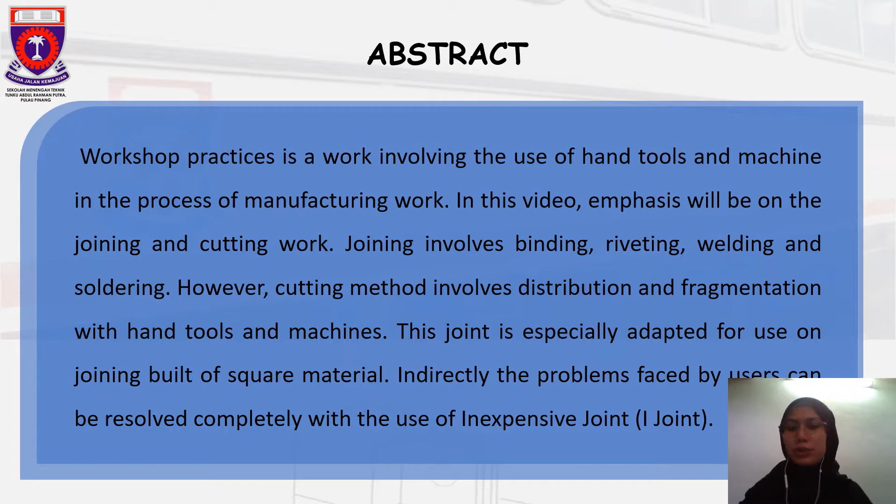A little bit on the abstract before we start our presentation. The main idea of this proposal is to reduce waste by giving full attention to recycled waste that has been disposed of, and we would like to turn the waste into a new product called Inexpensive Joint, I Joint.

Before we go through the problem statement, let me give some explanation on the introduction and project background on how the title was proposed. Workshop practice is work involving the use of hand tools and machines in manufacturing works. This report emphasizes joining and cutting works. Joining involves binding, riveting, welding, and soldering. Cutting methods involve distribution and fragmentation with hand tools and machines.

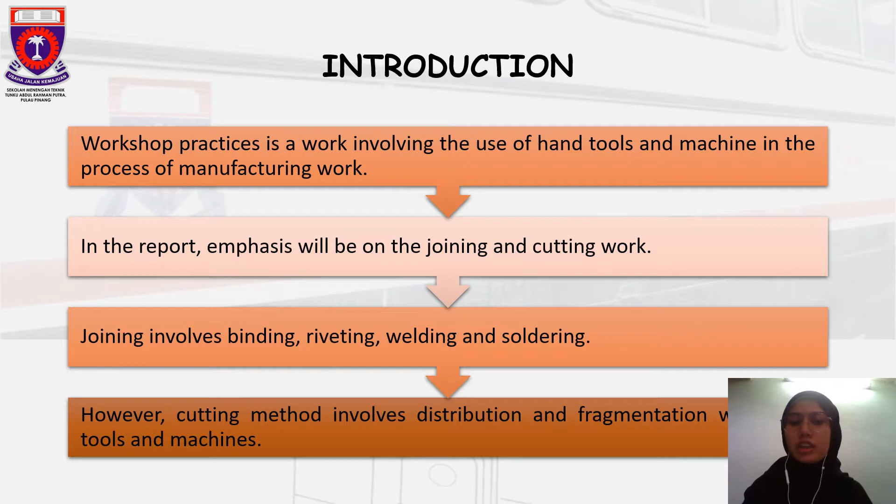The purpose of I Joint is to ease the user to install the extension that is low cost and user friendly. Other than that, it has a strong structure and is easily installed and maintained.

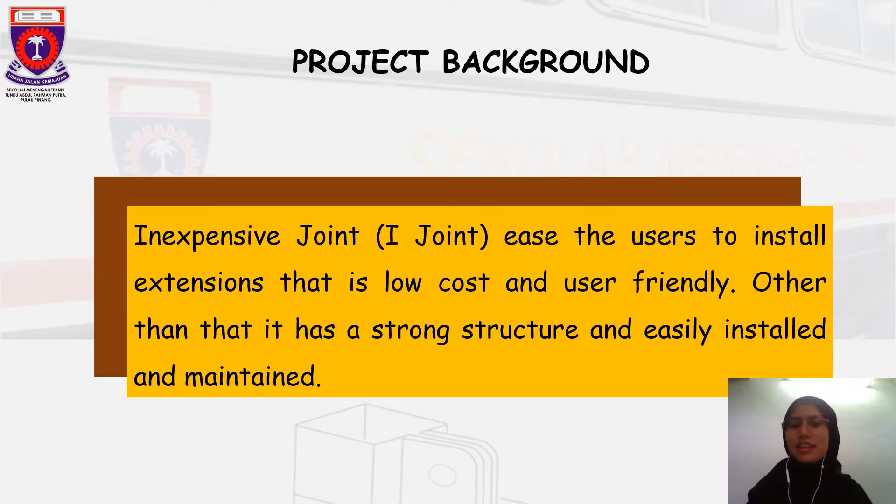Our attention now to the problem statement. Rapid growth in the metal industry has taken the country toward an industrialized nation, so these tools and machines are needed in work involving joining.

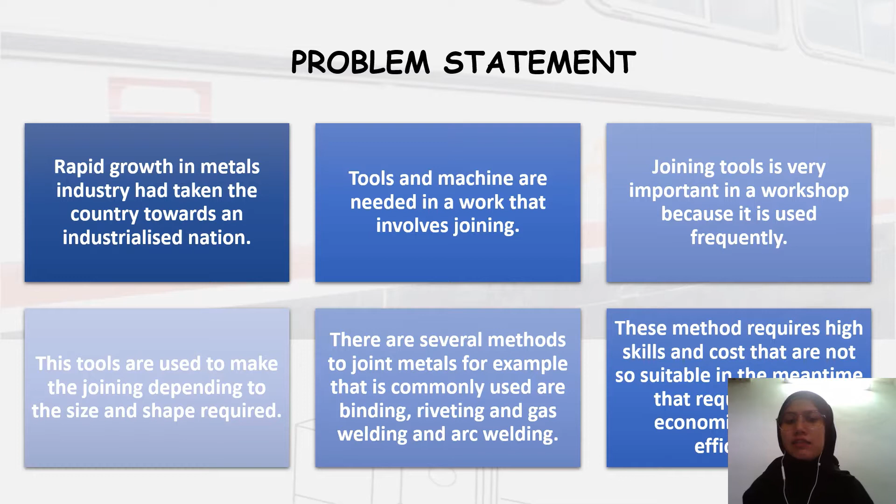Joining tools are very important in the workshop because they are used frequently, depending on the size and shape required. Several methods to join metal that are commonly used include binding, riveting, gas welding, and arc welding. These methods require high skill and cost, which are not suitable when work requires economy and time efficiency.

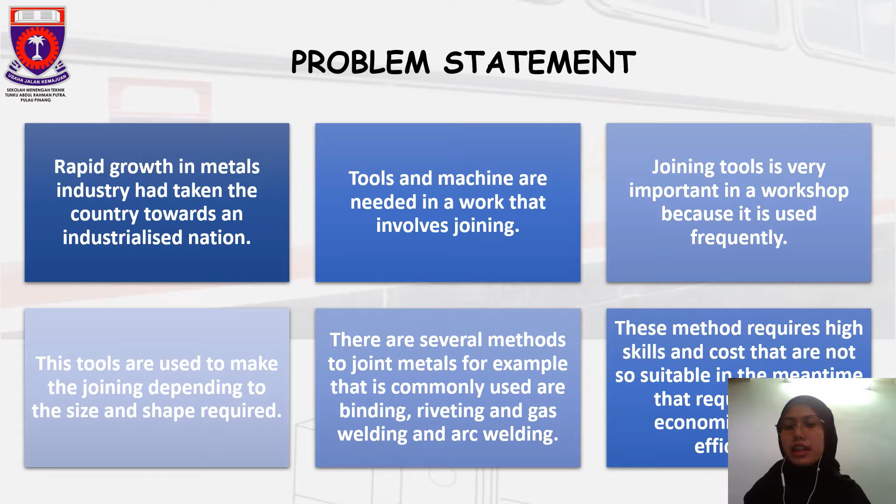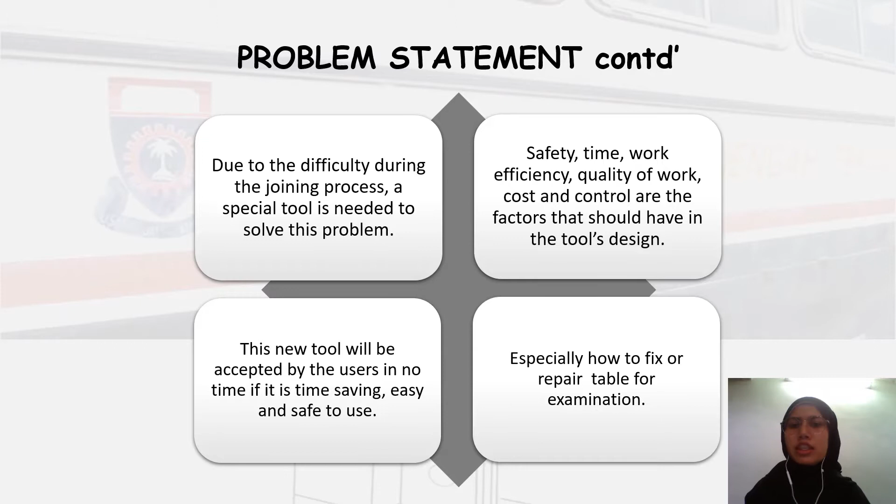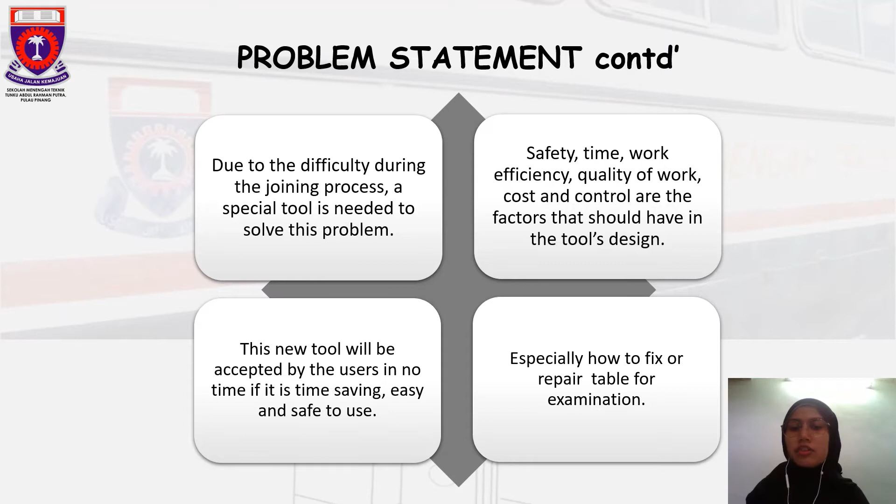As we are aware, due to the difficulty during the joining process, a special tool is needed to solve this problem. Safety, time, work efficiency, quality of work, and cost control are factors that should be in the tool design. These new tools will be accepted by users in no time if they are time saving, easy and safe to use, especially for fixing or repairing the table for examinations.

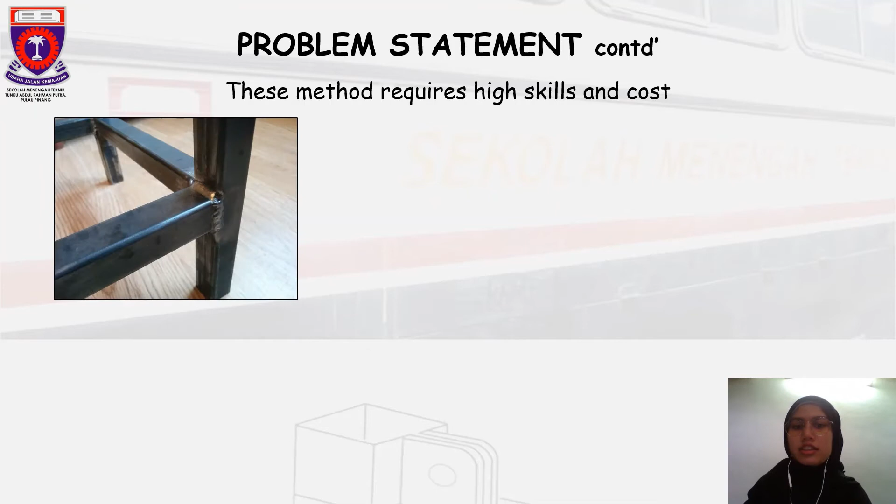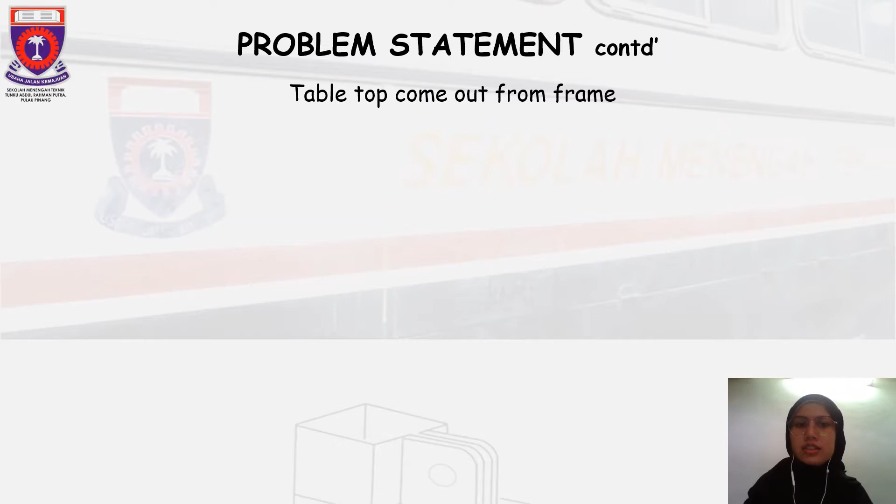Other methods require high skill and cost. This is a type of binding or joining that has been in our market. For our iJoin, we came up with a case study - this is a tabletop that has come out from the frame.

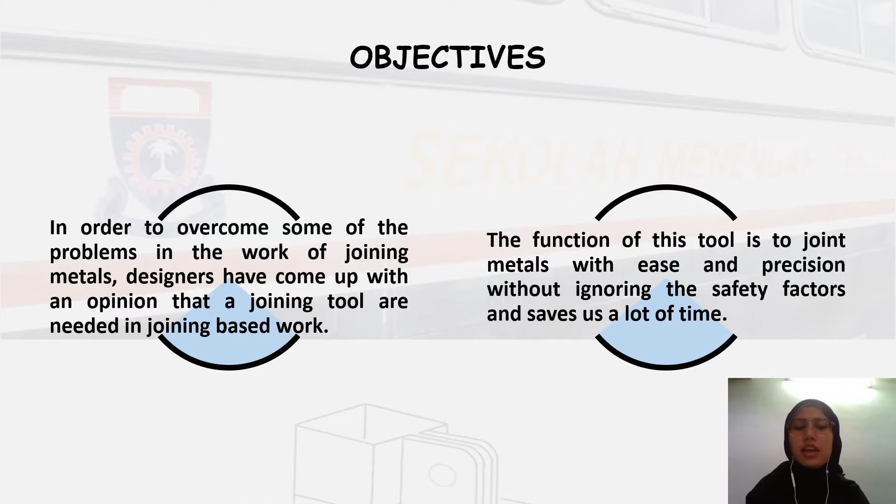Shall we continue on the objective of this innovation project? In order to overcome problems in joining metal work, designers have come up with an opinion - joining tools needed in joining-based works. This function of tools is to join metal with ease and precision without ignoring the safety factor, and to save a lot of time.

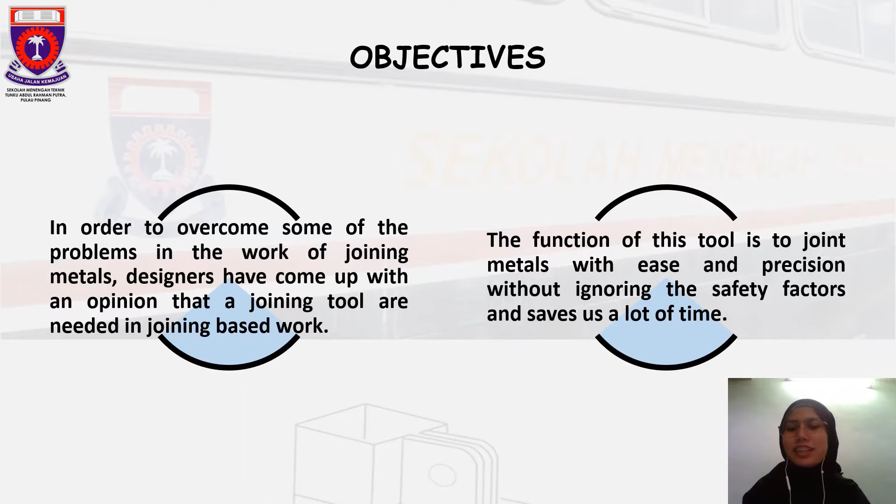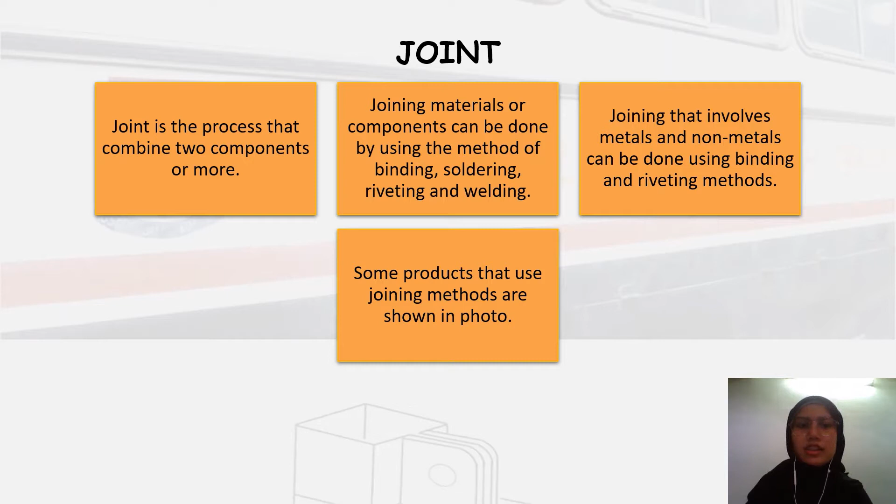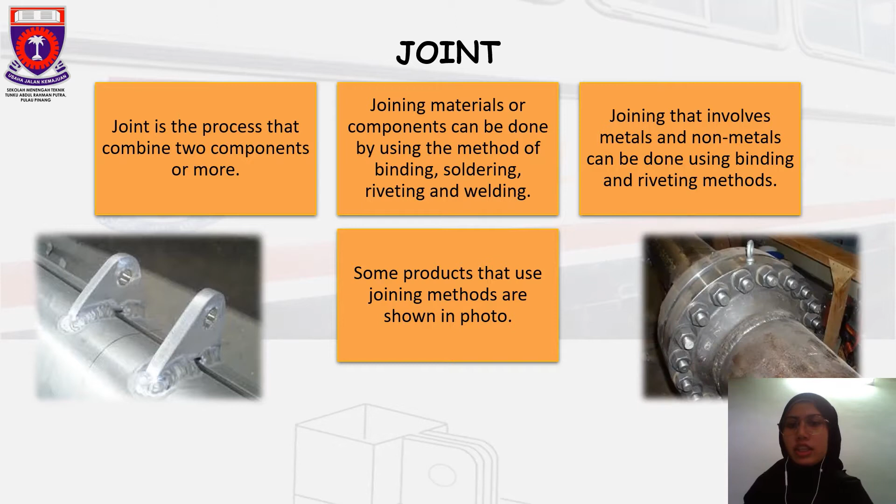Before we move to the next slide, let me elaborate on the join. The join is a process that combines two components or more. Joining material or component can be done using the methods of binding, soldering, riveting, and welding. Joining that involves metal and non-metal can be done using binding and riveting methods. Some products that use joining methods are shown in the photo.

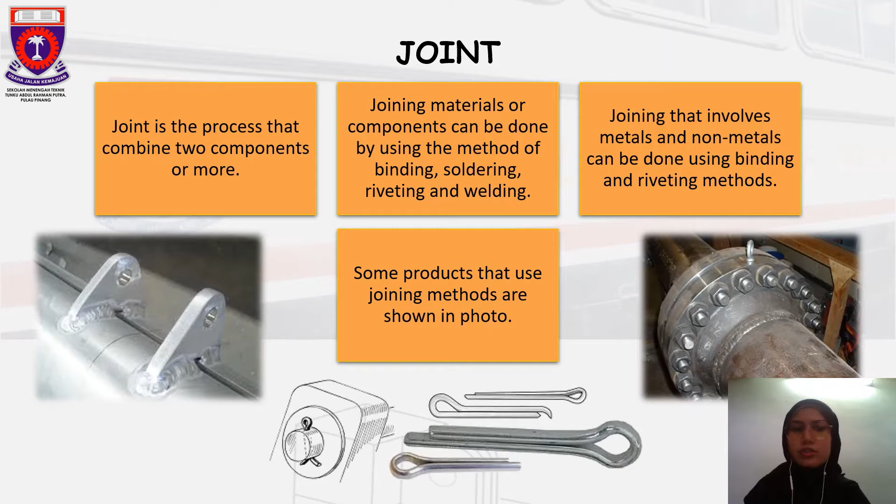These are the list of joints that have been available in the market distribution.

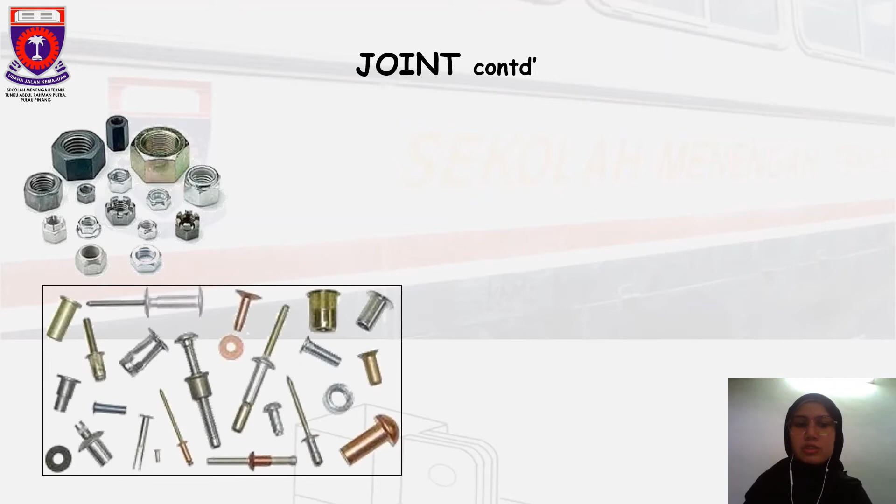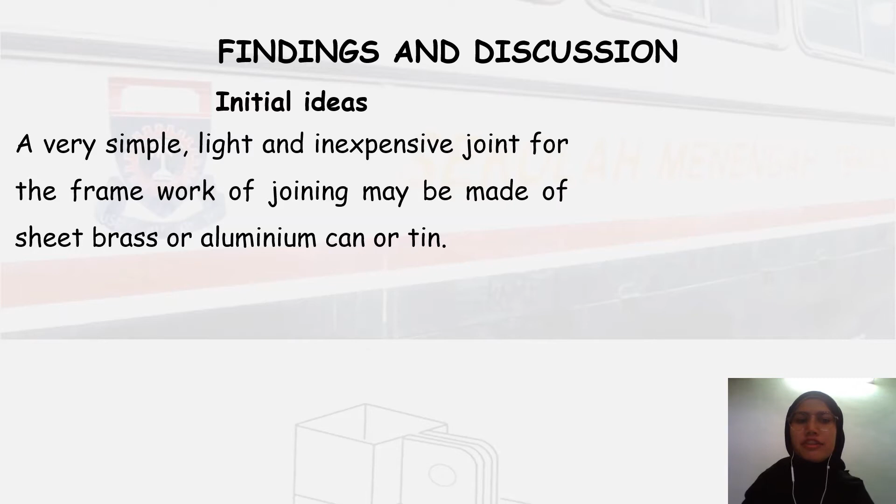We have arrived at the finding and discussion. For the initial idea, a very simple, light and inexpensive joint for the framework of joining may be made from sheet brass or aluminum tin can.

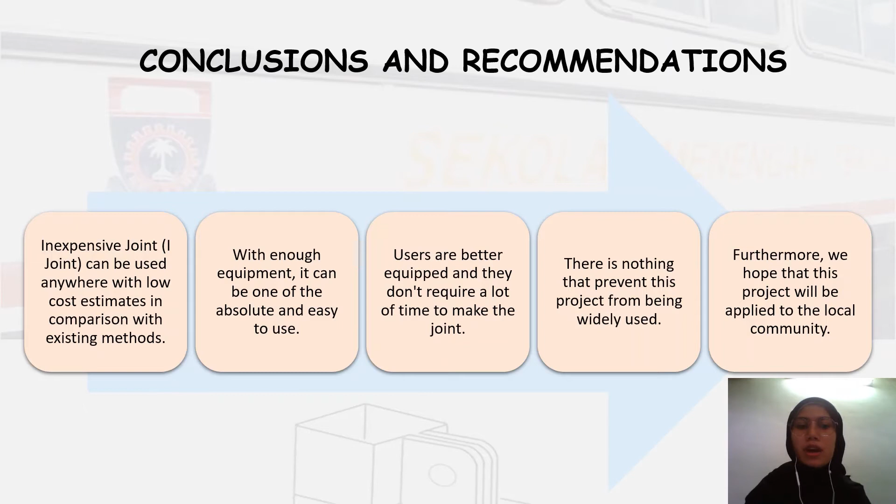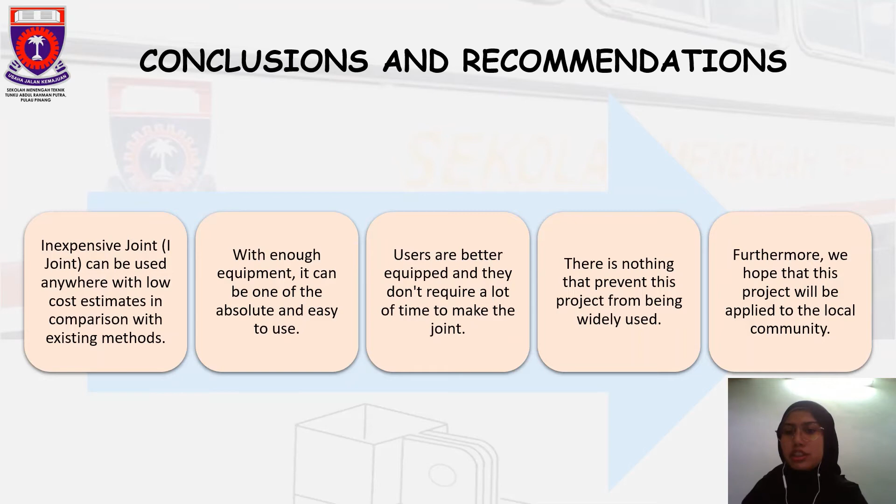Moving on to the conclusion and recommendation. The inexpensive joint, I Joint, can be used anywhere with low cost estimation in comparison with existing methods. With enough equipment, it can be one of the most absolute and easy tools to use. Users are better equipped and do not require a lot of time to make the joint, so there is nothing to prevent this project from being widely used. Hopefully in the future, we hope this project will be applied to the local community.

Next, I would like to share the method and procedure on how I Joint is made. The first thing to do was remove the bottom using a can opener.

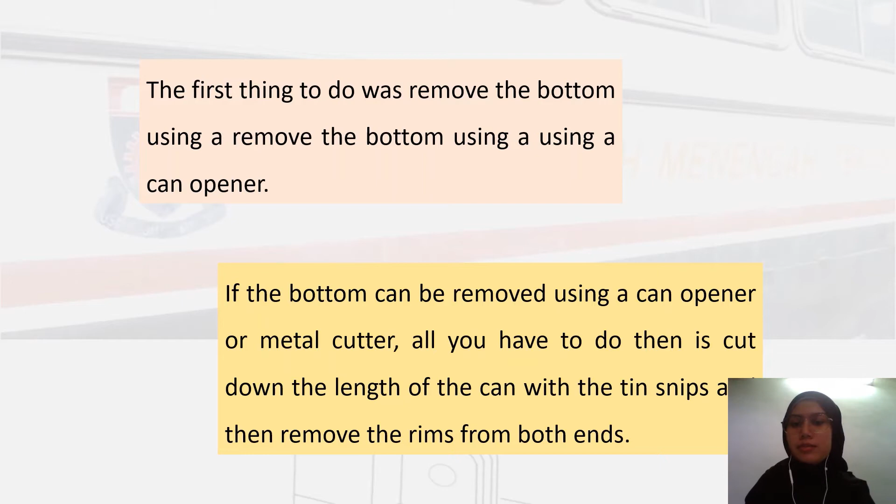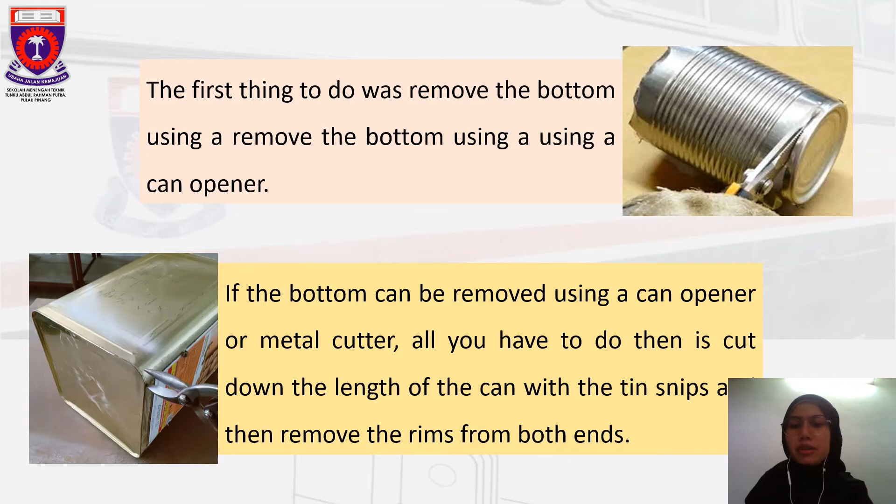If the bottom can be removed using a can opener or metal cutter, all you have to do is cut down the length of the can with tin snips and then remove the rims from both ends. This is a more elaborate photo to show how to remove the rims from both ends.

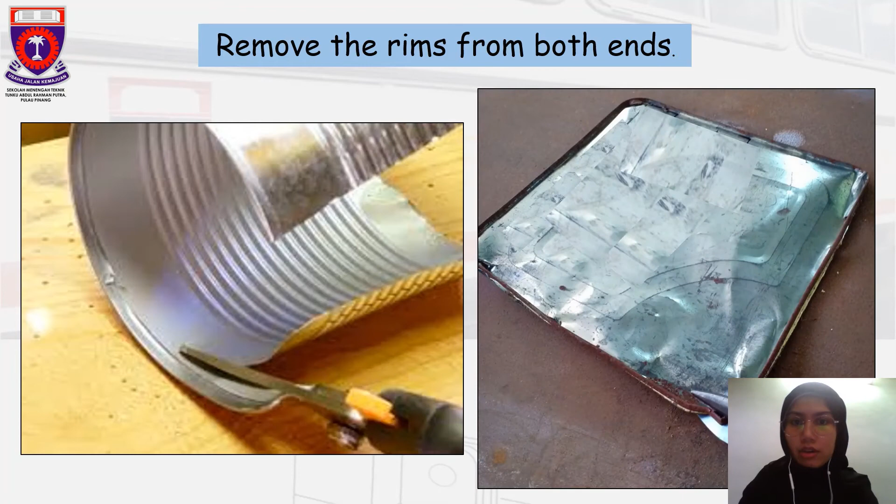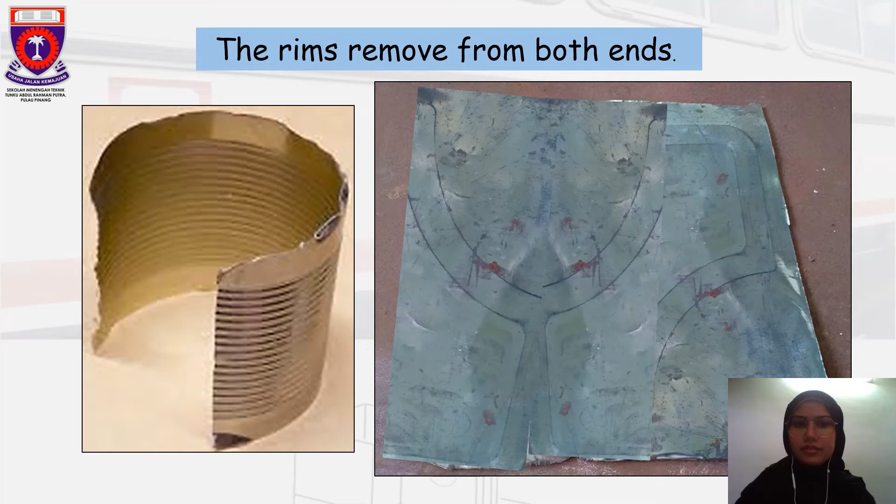Then start the process by carefully pulling the sides of each end apart from each other while gently pushing on the metal with your thumb.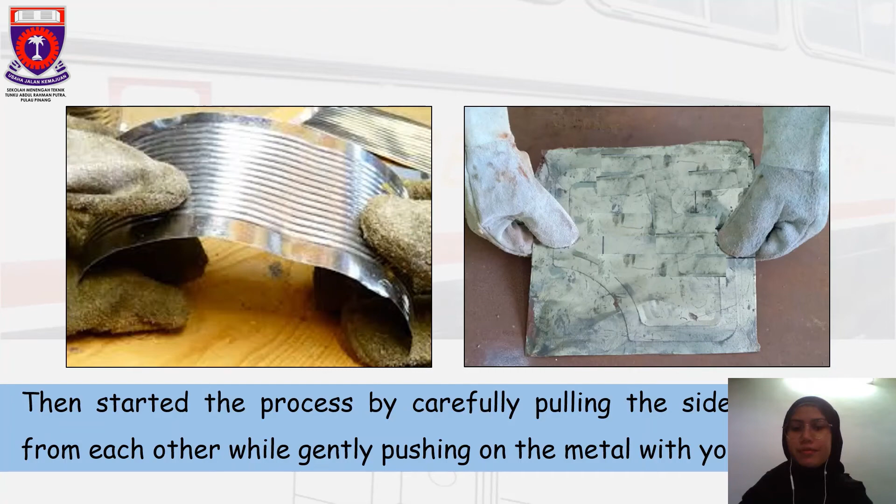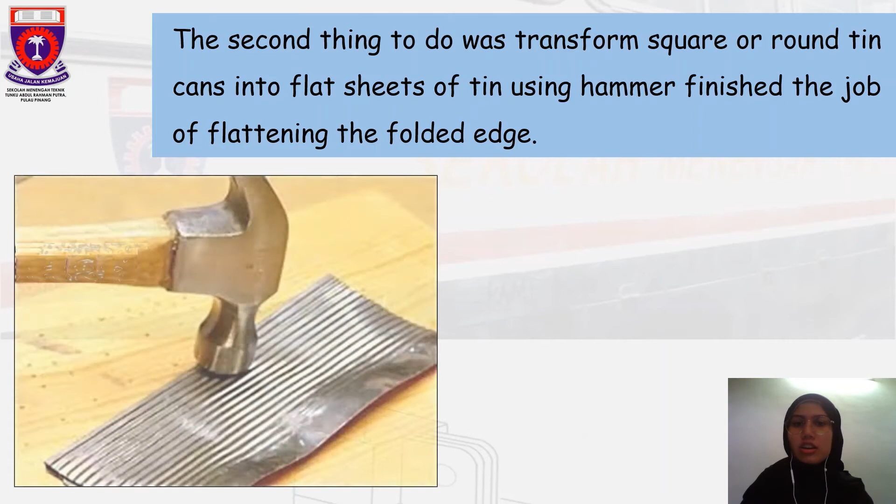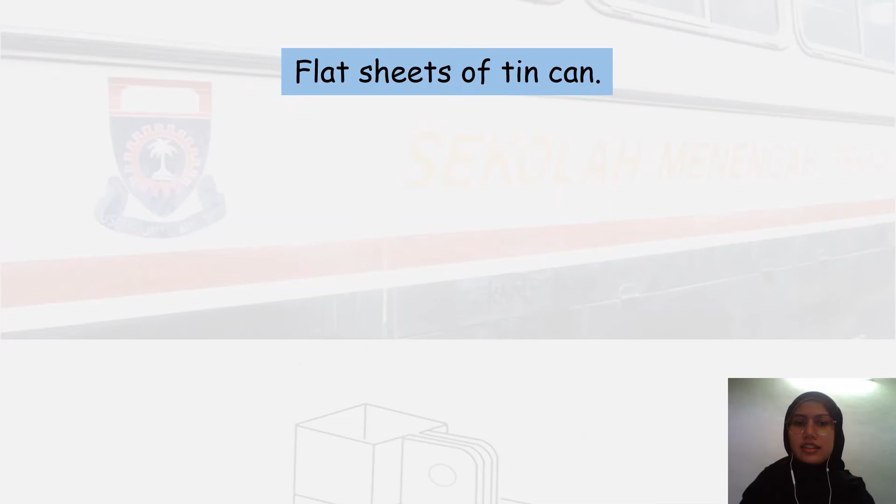The second thing to do was transform the square or round tin can into a flat sheet of tin, using a hammer to finish the job of flattening the folded edges. This is an example of what the flat sheet of tin can should look like.

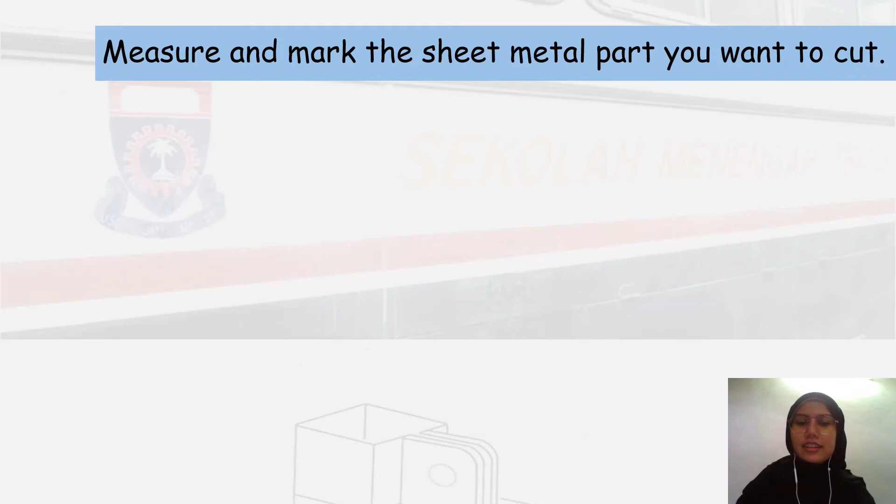The next step is to measure and mark the sheet metal part that you want to cut. This is the shape of the inexpensive joint by using the drawing structure.

From the drawing, the sheet metal has been cut accordingly to the shape and dimension. Then we got the end product of the I Joint.

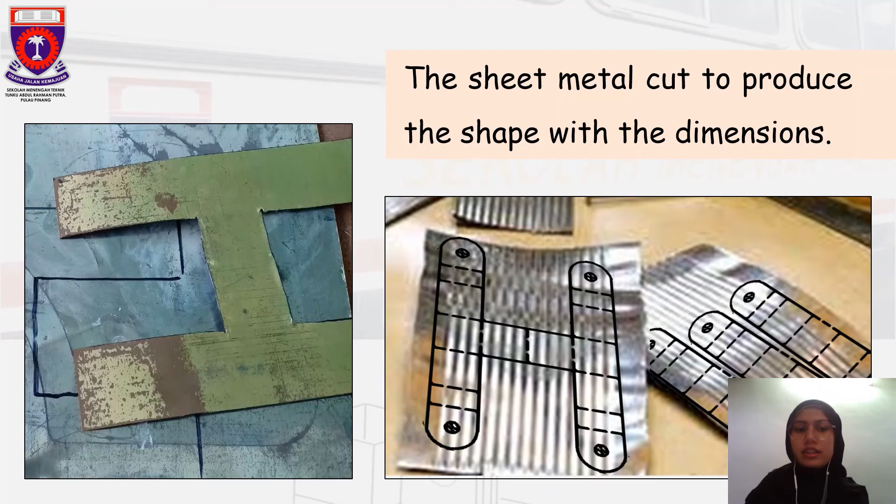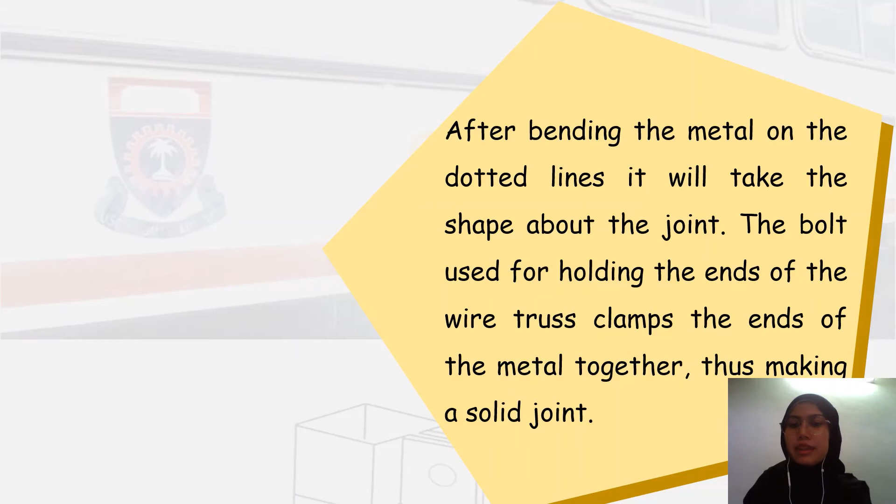Bending the metal on the dotted line gives it the shape of the joint. The bolt used for holding the end of the wire truss clamps the end of the metal together, thus making a solid joint.

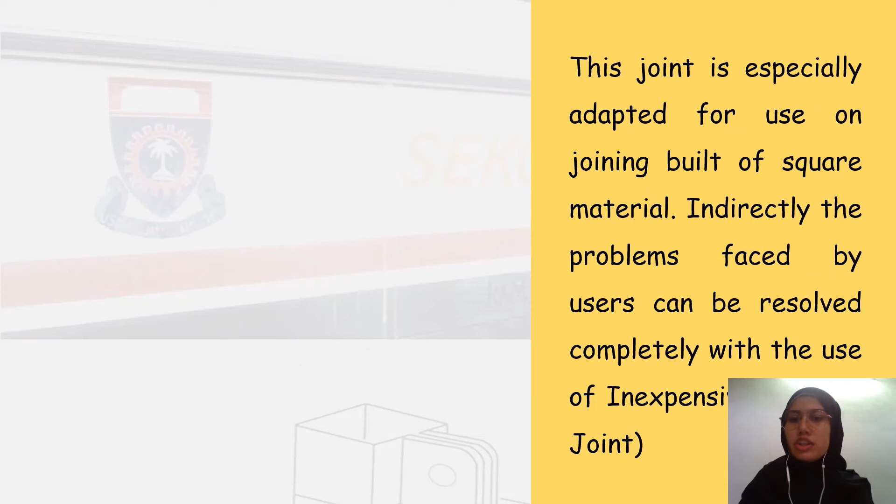This joint is especially adapted for use in joining built of square material, so indirectly the problem faced by the user can be resolved completely with the use of I Joint. This is an initial prototype product that has been completed using I Joint.

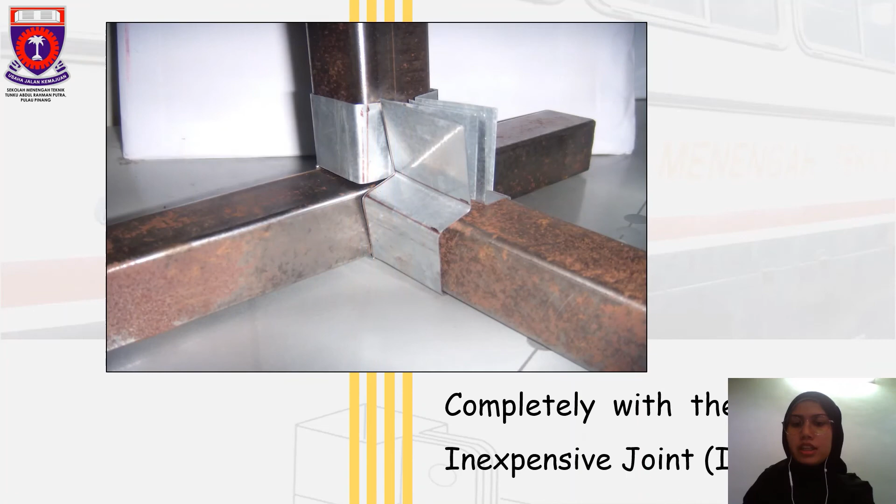Focusing on the joining, this is an example of the installation on the examination desk.

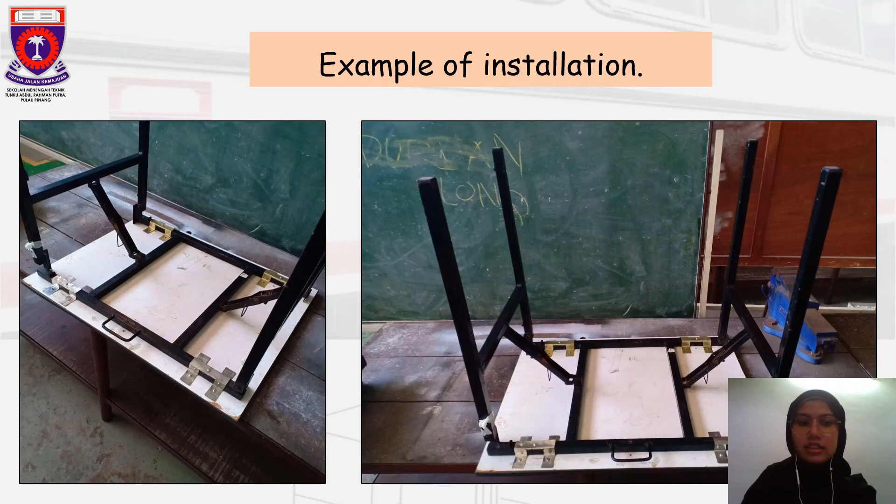For future references, we hope that with the availability of I Joint, it can help gain benefit in the best possible addition, so it can be used as a reference for anyone who wishes to enhance the ability of I Joint in the future.

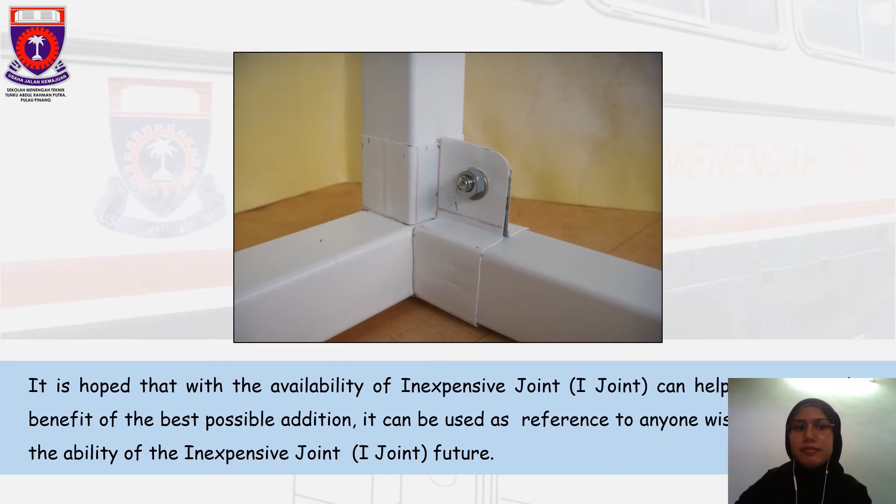This is the full use of the I Joint. It can actually withstand - if a person sits on the tabletop, it can withstand 80 kg. On normal plywood, it can withstand about 5 kg.

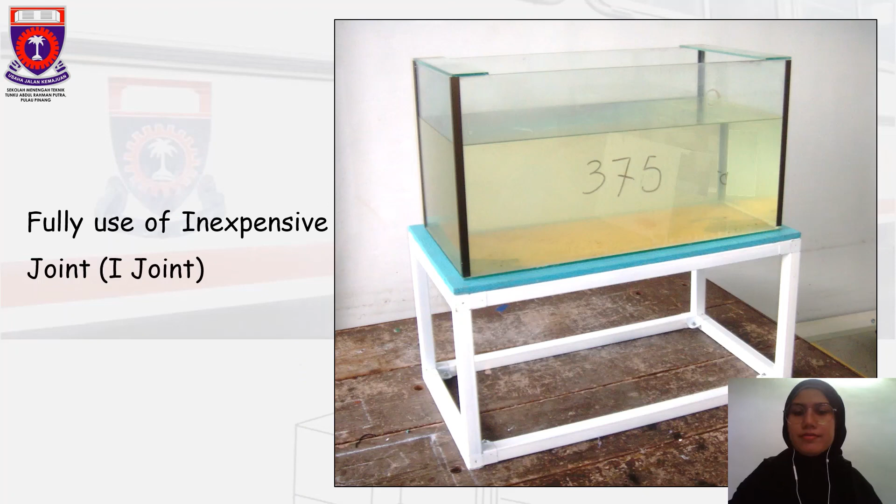This is the end of our case study, the full use of I Joint, before and after.